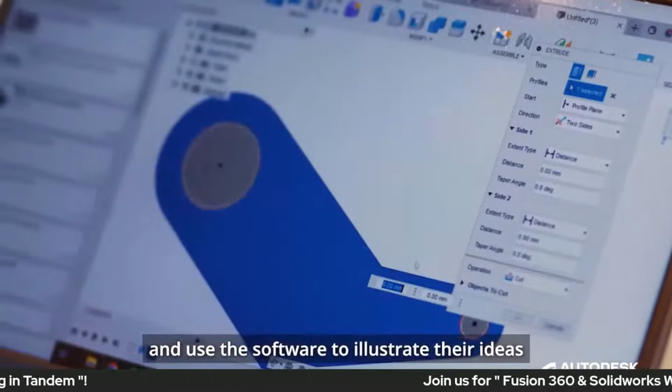We have donated about 20 canes to Society of the Aged Sick and St. Luke Nursing Home. Fusion 360 allows students to draft their design and use the software to illustrate their ideas and inform their discussions. Fusion 360 can be easily downloaded to a student's personal laptop and it is user-friendly. Our students knowing Autodesk products give them an edge in terms of future employment.

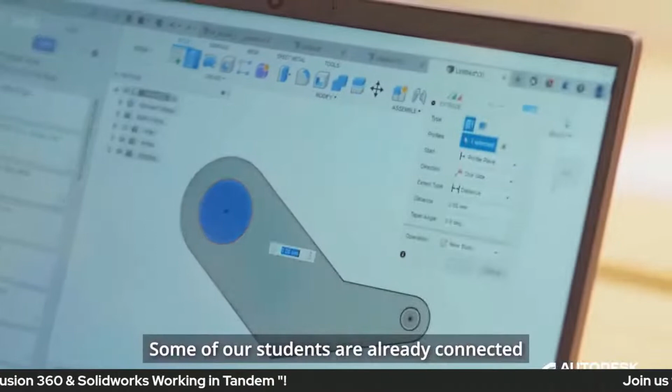Good afternoon, classmates. The last topic in today's webinar is entitled Fusion 360 & SolidWorks Working in Tandem. A little background for our topic today: SolidWorks is an assembly-oriented parametric program that offers advanced features for professionals. Its complex, customizable interface is geared towards experienced users. Fusion 360, on the other hand, is a multi-component part system that combines parametric, direct, and mesh modeling tools.

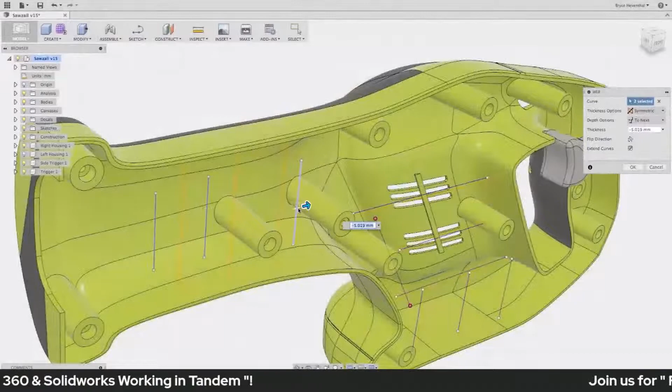What is Fusion 360? Is it a cloud-enabled collaboration platform that enables designers to instantly share, review project data, manage versions, find where used, and share ideas on any device at any time? Is it a 3D CAD application with both freeform and solid modeling tools seamlessly integrated into one application? Is it a 3D animation and rendering application? Is it the first cloud-enabled tool to provide 2D drawing capabilities? Is it simulation software? Or is it a CAM application for turning and milling operations?

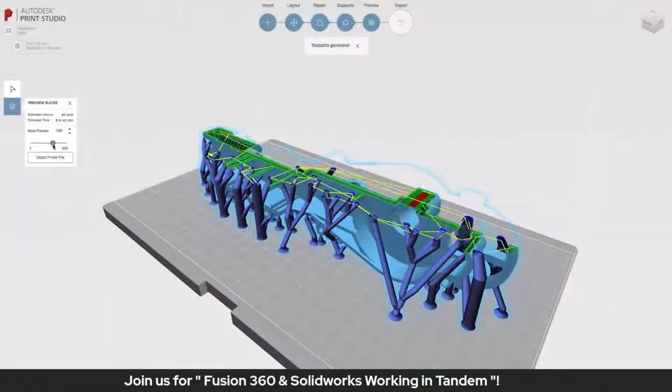This is what you need to know about Fusion 360. It's not any one of those things. It's all of those things. It's the next generation product innovation platform designed to work on Mac, PC, and mobile devices.

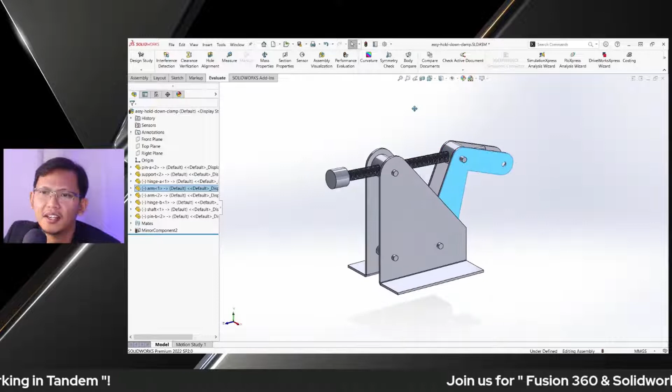I'm sure some of you guys have your own assemblies made in SolidWorks. So for me, in this demonstration, I have this assembly in SolidWorks. And my intent here is to bring this design over to Fusion 360. And let's say, in addition, my intent is to create a generative design, similar to this motorcycle.

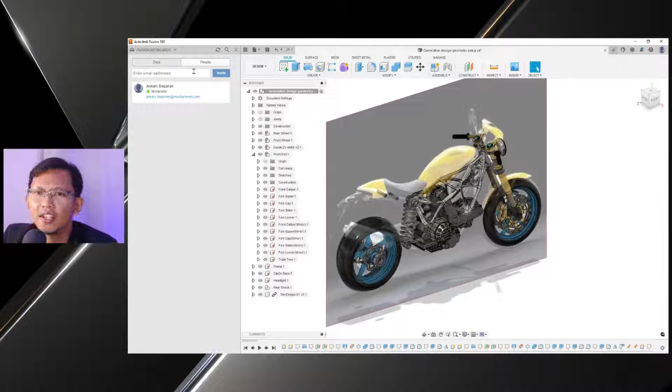Okay, so moving forward, I'm going to go back to Data. And I have gone ahead and created a new project, which is Tandem with Fusion 360. Same with Autodesk Inventor, Fusion 360 also has the AnyCAD technology. Again, our intent here is to bring in the native SolidWorks files into Fusion 360. To do that, I'm going to select Upload.

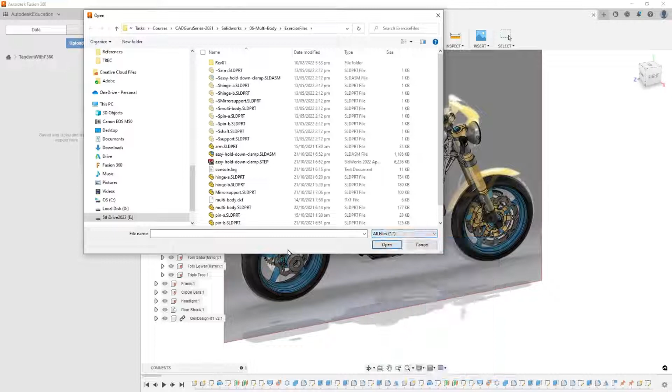And notice here under Select Files, under this drop down, Fusion 360 can accept files natively, even from CATIA, of course Inventor, the typical AutoCAD files, NX files, Pro Engineer, Rhino, yes, SolidWorks, Solid Edge, and also SketchUp files. So that's how versatile Fusion 360 is with working with other CAD platforms or CAD files.

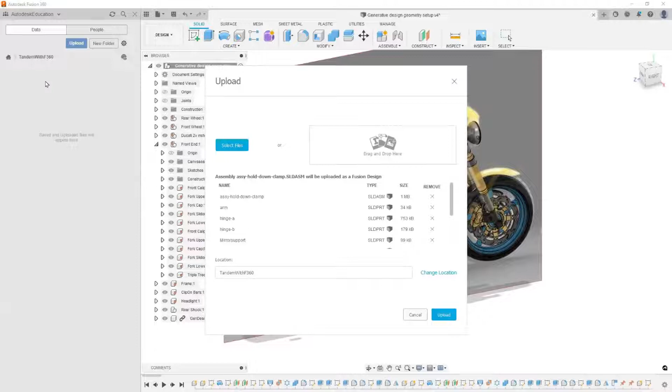Okay, so once more, I have my SolidWorks files saved in my local folder. So with this, I can easily drag and drop those SolidWorks files here. I can select all of the parts and assembly related to our SolidWorks design. So with these SolidWorks files selected, I'm going to left click and hold, simply drag and drop. So take note, check where your target location is. And now I'm going to select Upload.

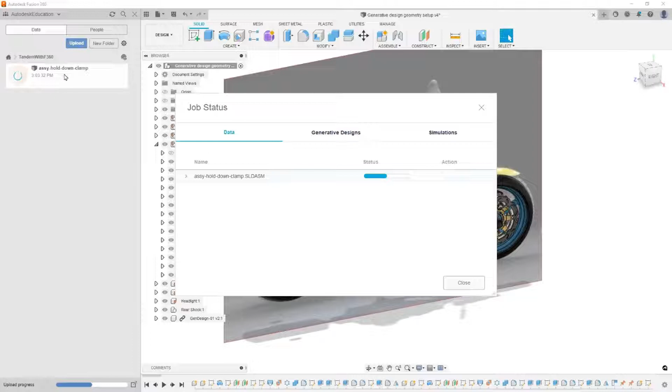Upload in progress. And notice on the left, we are seeing the files are populating this folder, starting with the assembly. Okay, assembly complete, selecting Close. Let's hover over assy hold down clamp. I'm going to right click and simply select Open.

Here it is. So notice in SolidWorks, this is the orientation of our assembly. Take note also of our axis: Y pointing up, Z pointing to the left. Heading back to Fusion 360, the orientation of Fusion 360 is, notice, Z is pointing up. Okay, so those are the initial differences between SolidWorks and Fusion 360.

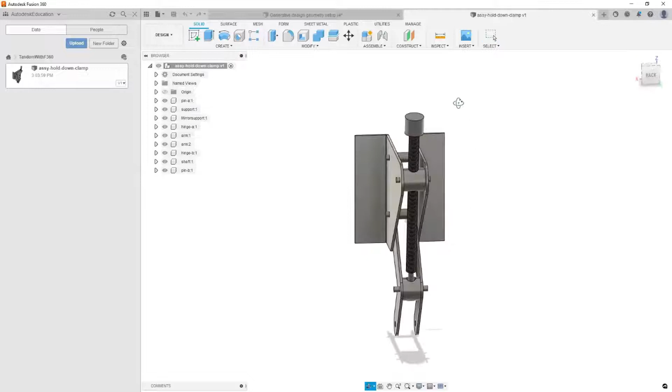So I prefer the orientation of this assembly to be the same as in SolidWorks. Okay, so with that, let me head over to Home View. I'm going to select Top and rotate this.

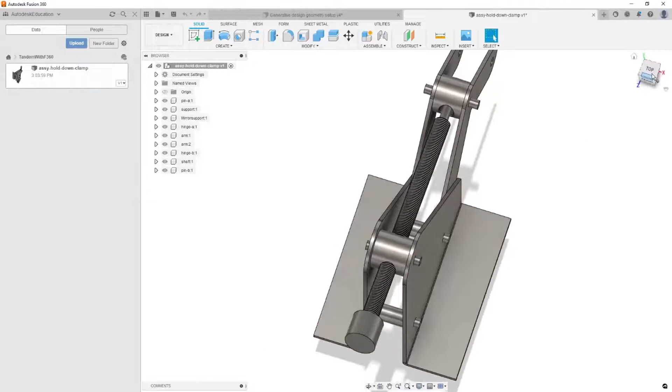Double click my middle mouse wheel to zoom extents. Heading back to our view cube, I'm going to right click and select Set Current View as Front. Okay, next I'm going over to Top View. Again, I'm going to right click on our view cube, Set Current View as Top.

Next, selecting Front, okay, and rotating this to our target isometric view. So notice the orientation of our view cube as well. I'm going to select this corner of the view cube, which will now give us the same orientation when I hit Control 7 in SolidWorks.

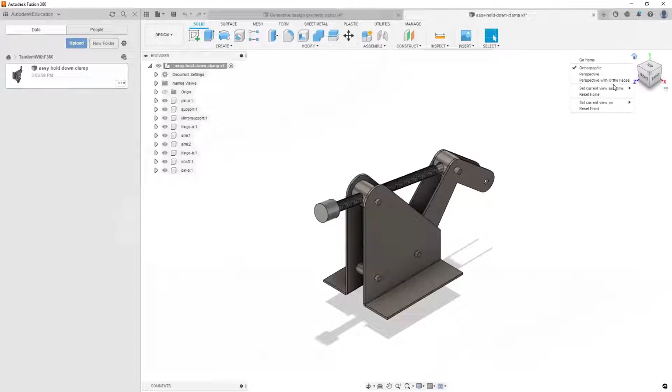So from here, I'm going to right click on this tiny house and set current view as home, fit to view. Okay, so now if I head back to home view, the orientation is now the same with SolidWorks.

For me, I already have the muscle memory for Fusion 360 and SolidWorks. But if you prefer to have the same navigation and controls in SolidWorks, we can head over to our profile under Preferences. We can head over to General, and under Pan, Zoom, Orbit shortcuts, we can select this drop down and change this to SolidWorks. In addition, Alias, Inventor, Tinkercad, and PowerMill are also available.

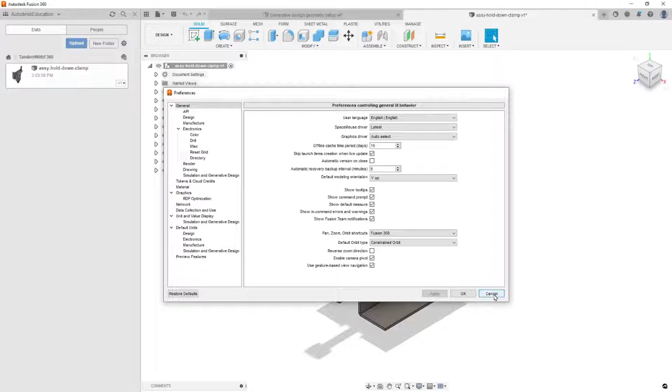Okay, selecting Cancel. And like any other software, sometimes Fusion 360 crashes as well. So let's hit Control S and save this file. Notice here from V1, it's now V2 or version 2. And because Fusion 360 is cloud-based, I can head over to our data panel and notice here we can open this design in our web browser. So I'm going to click Open on the web.

And let me show you my web browser. Notice here I have all projects. And here we have our project, which is Tandem with Fusion 360. So on the right, under Project Details, I can manage members and invite. I can invite our attendees right now who have registered and give them access to this design as an editor or simply as a viewer.

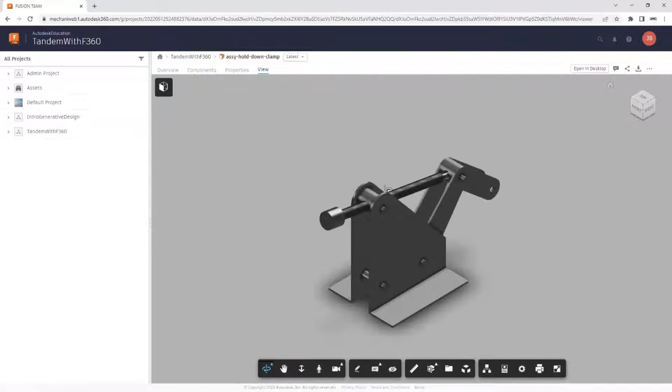So for viewer, the application for that is sharing this to your managers who have no need to edit, or to your suppliers and vendors. So here, going back once more to Tandem with Fusion 360, I'm going to select our file and left click here to open our design in our web browser.

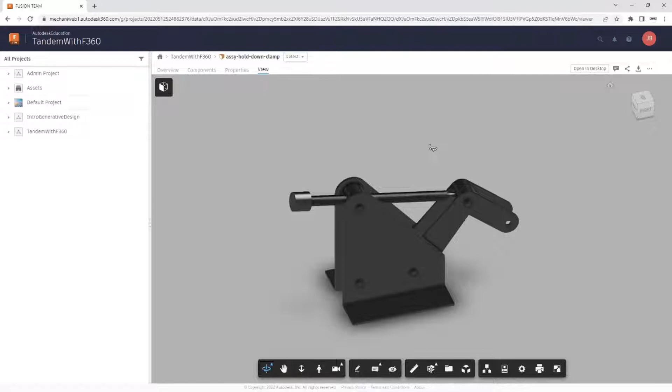So once more, if you moved to a different location and you don't have Fusion 360 natively installed, you can access your files anywhere with just a web browser. And that's an advantage of Fusion 360 being linked in the cloud. Also in this viewer, notice below we can add markups. Let's say I'm going to scribble down a circle. I can add comments. Let's say I would like to say greetings to all our students.

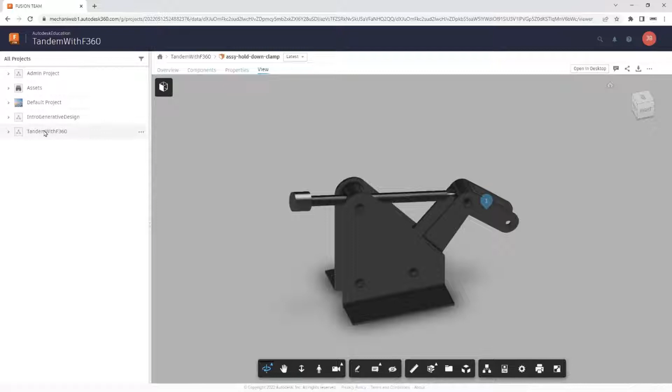In addition, we can measure our design, have a section analysis, or do an explode model. Let me head back once more to the Tandem with Fusion 360 project. And I hope everyone is familiar with Google Drive. So with Autodesk and Fusion 360, the equivalent for Google Drive is A360. So with that in mind, we can also upload non-Fusion 360 files into Fusion 360. So for demonstration, let's say I would also like to save these native SolidWorks files into Fusion 360.

With my target files selected, I'm going to copy the location of our folder, hitting Control-C, heading now to our web browser, selecting Upload, and in addition, notice we can upload files coming from Dropbox. I'm going to select File, paste down its location, and from here, we can now select these SolidWorks files. In addition, let me add this DXF file as well. Notice multiple selections allowed, selecting Open. Files now being uploaded.

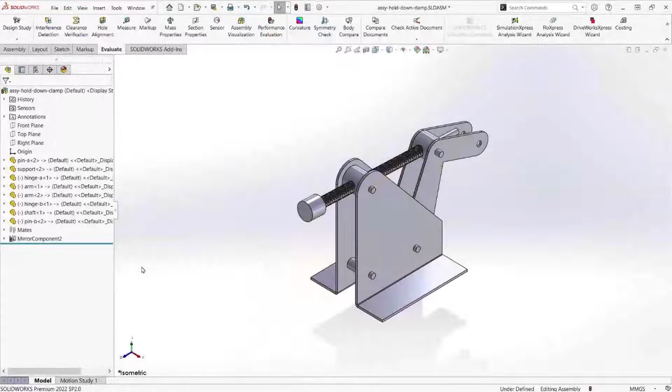Another important distinction between the two is in SolidWorks, we have the Feature Manager Design Tree, where all features are registered on the left side, while in Fusion 360, the features and history are all registered below. And when we import a non-native Fusion 360 file, initially, the timeline is not available. So notice here, it's just comments and the navigation bar. To bring that up, all we need to do is head over to our main file. I'm going to right-click on the hold down clamp assembly, and simply enable Capture Design History.

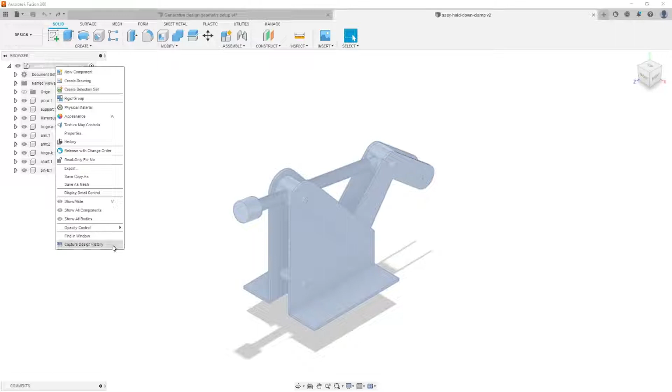So notice we now have the timeline, which is once more the equivalent of the FeatureManager Design Tree, where every feature that we are utilizing and creating in Fusion 360 will be registered here.

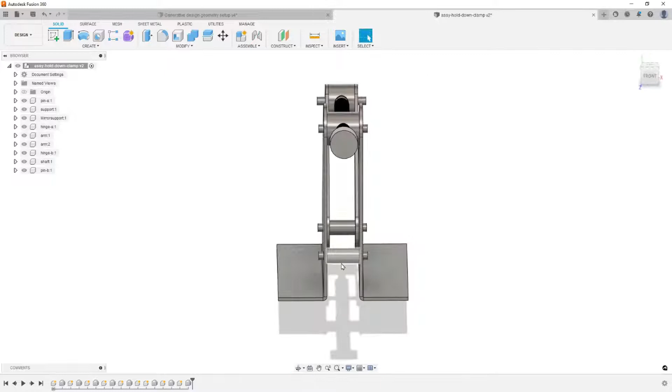I'm going to hover over pin A, selecting this, right click, and select Ground. When we ground something, we are removing all of its degrees of freedom. So notice as I left click and hold, I can't move the pin. But of course, the rest are free to move, having their degrees of freedom still not yet defined.

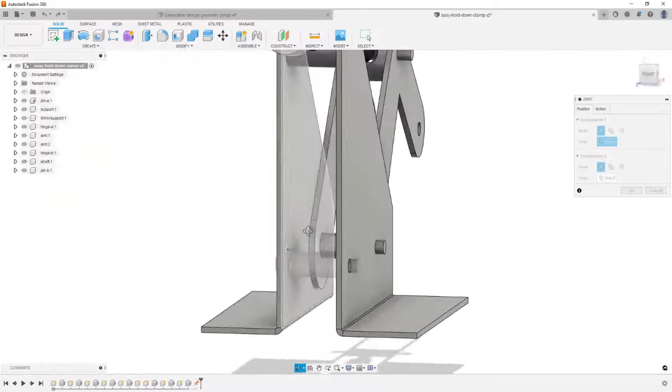Moving forward, let's now add joints. Heading up to Assemble, selecting Joint. And before we pick out the joint origins, let me head over to this Motion tab and set our target motion type to be rigid. Heading back to Position, and for Component 1, I'm going to hover over this face. So notice the joint origin attached to our cursor. Again, notice as I am hovering over these faces.

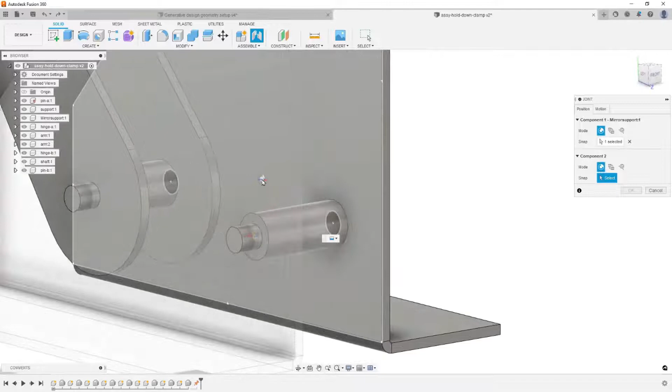Next, I'm going to hold Control while hovering over this face. And notice as I hover over other faces, I am locked to this face. So with that, I'm going to select this joint origin, left click, heading over to our pin A and defining the joint origin for component 2, hovering over this face, holding Control, and left click. So notice those joint origins mate with each other. I'm going to select OK and inspect.

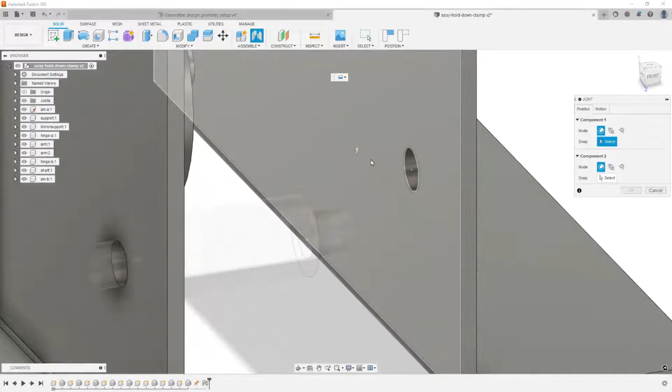Next, applying the same procedure. In addition, recall our previous command was joint. So with that, I can right click in Fusion 360 and select Repeat Joint. Hovering over this face, holding Control, selecting this joint origin. Left click, heading over to our pin A, hovering over this face, holding Control, and selecting this joint origin. Left click, selecting OK.

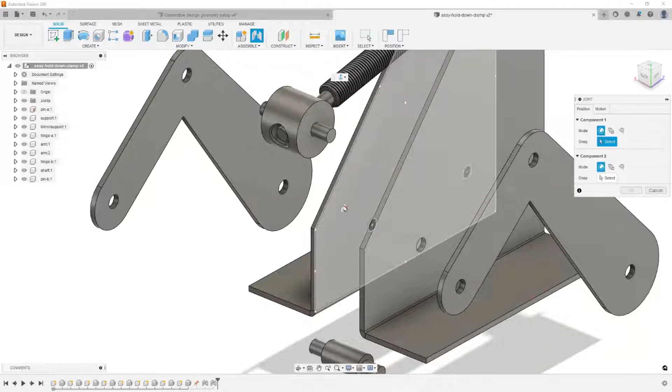Next, let's bring in our arms, and let me pull this pin out, hitting J, the shortcut for joint, and this time our target motion type to be revolute. Heading over to Position, hovering over this face, holding Control and selecting this joint origin. Next, moving over to the other side, hovering over this arm's face, holding Control, selecting this joint origin, selecting OK. Let's inspect. I'm going to hover over this face, left click and hold. Repeat that step once more.

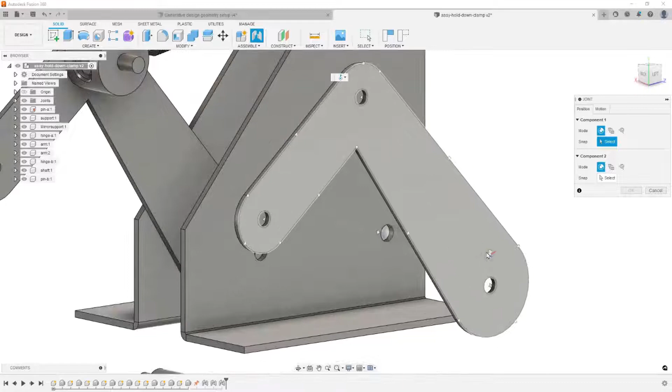Hitting J for joint. Hover over this face, selecting this joint origin. Heading over to our support. Holding Control, selecting this joint origin. Notice the preview. Obviously, it's revolute. Selecting OK.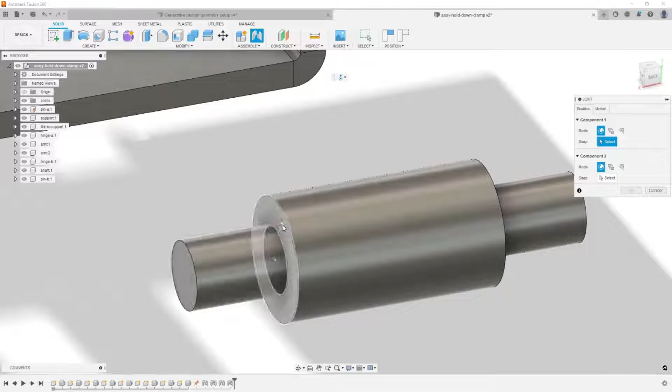Next, let's bring in pin B over here. Hitting J for joint. Motion type to be revolute. Hovering over this face, holding Control, selecting this joint origin. Moving over here, holding Control, selecting this joint origin. Selecting OK. In addition, we can also add that revolute. But for this instance, it will now suffice.

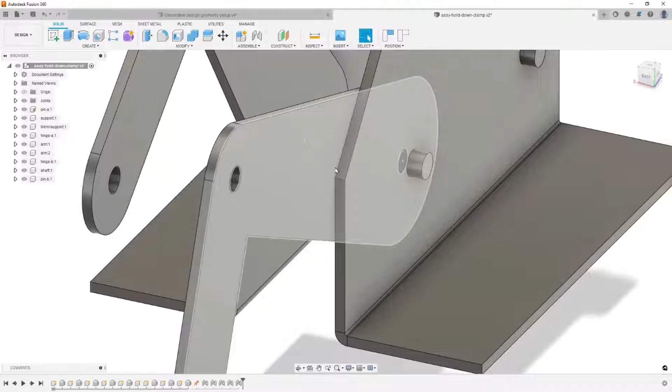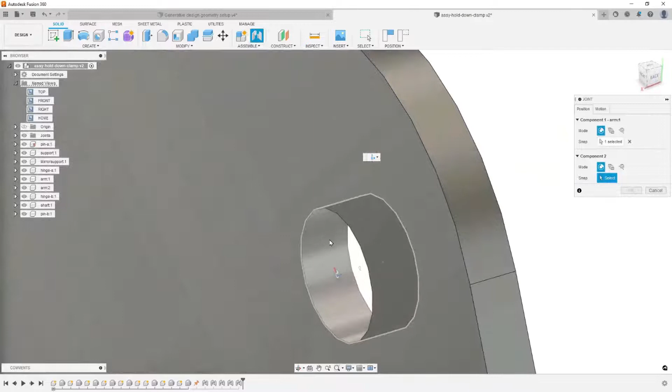Moving forward, let's focus on our arm. Let me move this to the side. Hit J for joint, motion type, how about cylindrical? Heading over to the Position tab for component 1. I'm going to hover over this cylinder, holding Control, and I'm going to select this joint origin at the center. For our component 2, I'm going to head over here, hover over this cylinder, holding Control and selecting this center joint origin. Selecting OK, and because that cylindrical joint relates with our revolute, notice it moves in unison.

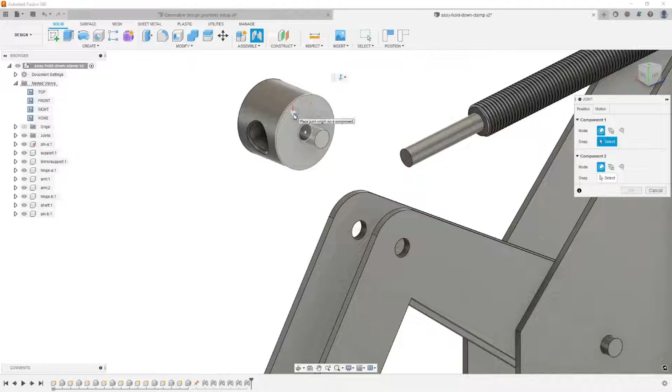And finally, for our hinge B, hit J once more, motion type this time to be revolute. Heading over to Position, defining component 1, hover over this face, holding Control, selecting this joint origin. And I want this to mate with this face, specifically this hole. Holding Control, selecting this joint origin. Selecting OK, and let's inspect.

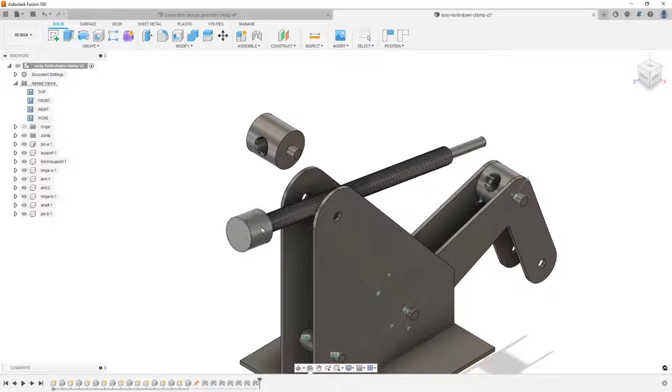Awesome. Moving forward, let's focus on hinge A. So moving this aside. Same with our shaft. Hitting J for joint, and I prefer utilizing revolute.

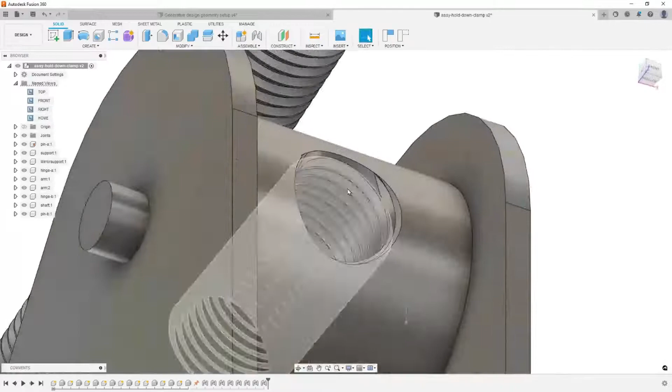Again, under motion, hovering over this face, selecting this joint origin. Hovering over this face, selecting this joint origin. Looking nice, selecting OK. Let's now bring in the shaft. And what I'm seeing now is having the challenge to select the face for our joint origin.

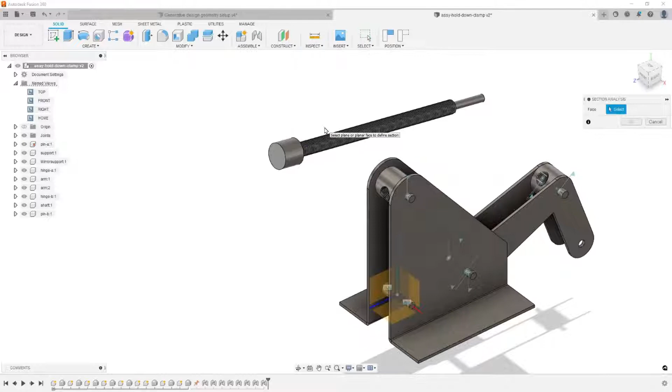Let me head over to inspect and let's have a section view. But first, let me bring this to the other side. Under inspect, selecting section analysis. I want to cut this assembly in half. So selecting YZ plane. Selecting OK. Let's now hit J for joint. And the motion for this should be cylindrical.

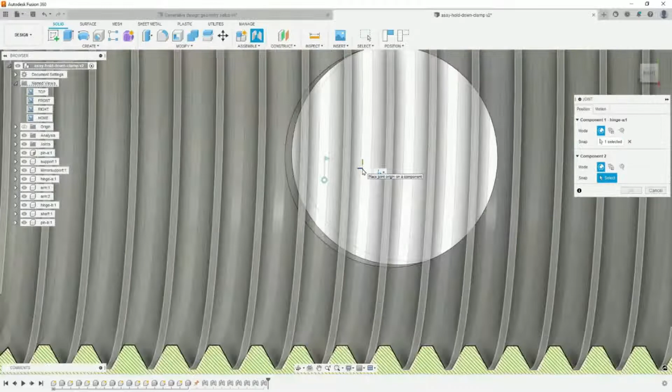And under position, let me hover over this face, holding control, and select this joint origin. I hope you're seeing this. Heading over to front view, so it looks like it's the center. And the same with our shaft.

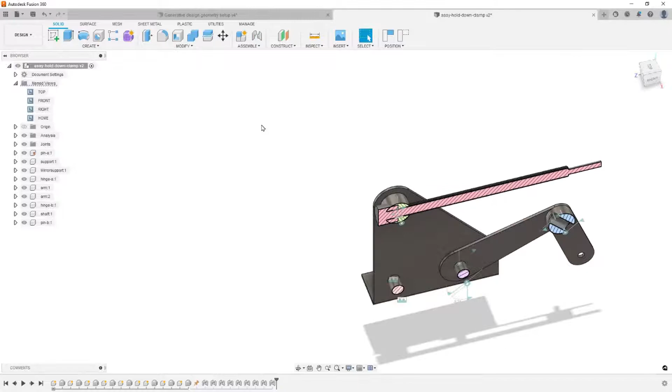I'm going to zoom in, hover over this face, holding control, and locating that joint origin, which is this origin. Notice the preview, selecting OK. And to turn off the visibility of the section analysis, it's simply heading over, twirling this down, and selecting this eyeball.

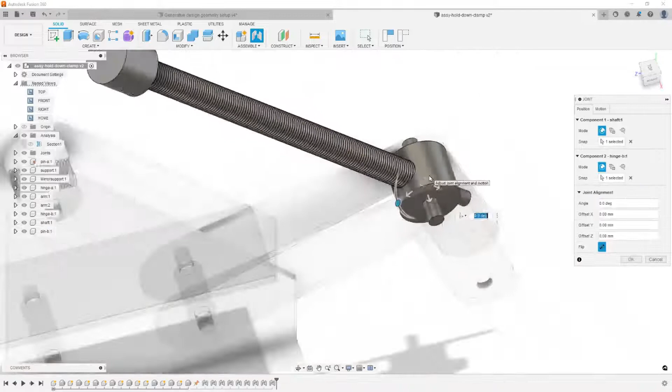Looking nice, and finally hitting J once more. Motion type to be cylindrical. Hover over this face, holding control, selecting this joint origin. Hovering over this face, holding control, and selecting this joint origin. Selecting OK. And let's inspect.

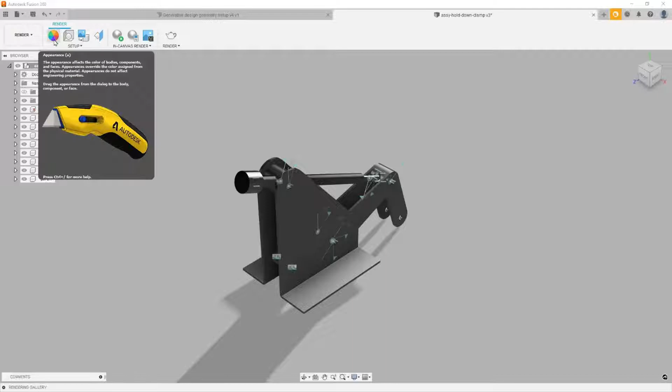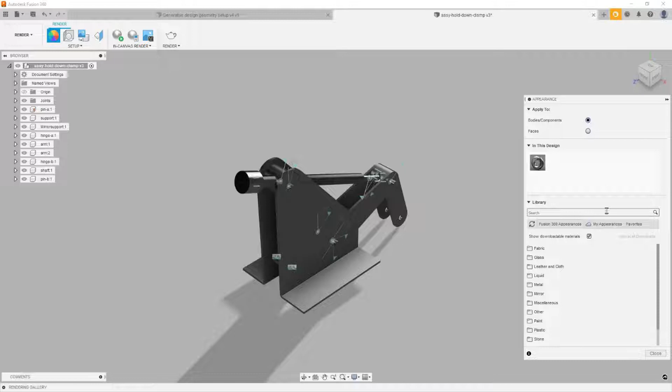The first step would be assigning the materials to our model. So shortcut key for this is letter A. And we have options here to apply this to bodies or components. So these are all bodies and or components. And the other one are simply faces. Okay, so let me first head over to our library, and by default, the default appearance of our bodies' components is steel satin.

So below on the library, we have tons of options. It can be metal. Let's say I prefer aluminum anodized rough blue. So it's simply left click and hold, drag and drop. So now in this design, we have an additional appearance, which is aluminum anodized rough blue. Okay, so to remove a specific appearance is simply right clicking here and unassign and delete.

Okay, so feel free to browse over the library. So we have glass, metal, once more, liquid, leather and cloth. We have paint. We have plastic. Okay, stone. So if you have woodworks. So for this demo, I would like to assign a glossy paint. And recall, a while ago, we applied appearance to bodies and components. For faces, let me enable faces.

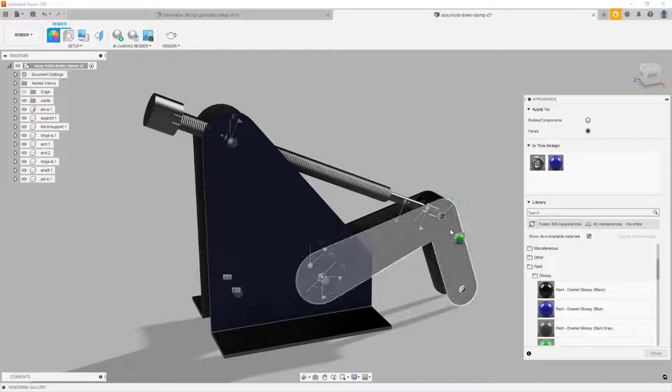It's simply left click and hold. Let's say I would like to assign paint enamel glossy blue to this face. Okay? Or green to this face. And for this scenario, I prefer adding appearance to bodies components instead of faces. I'm going to delete and unassign this in our design.

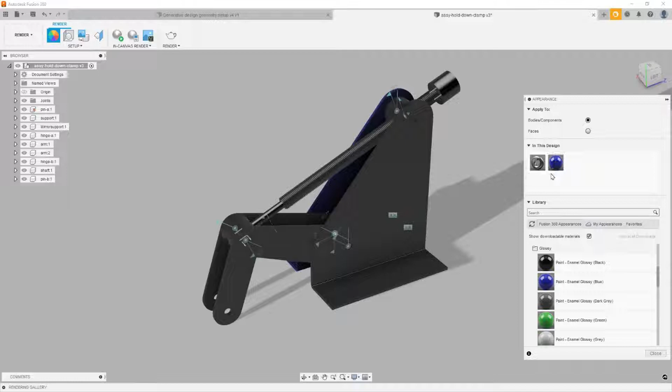Let's enable apply to bodies and components, assigning paint enamel glossy blue to our support. Same on this mirrored component, hitting A. And from here, because this is prevalent, I can head over here in this design and reuse this. Drag and drop. Let's say for our arm, I prefer yellow color. Left click and hold, drag and drop.

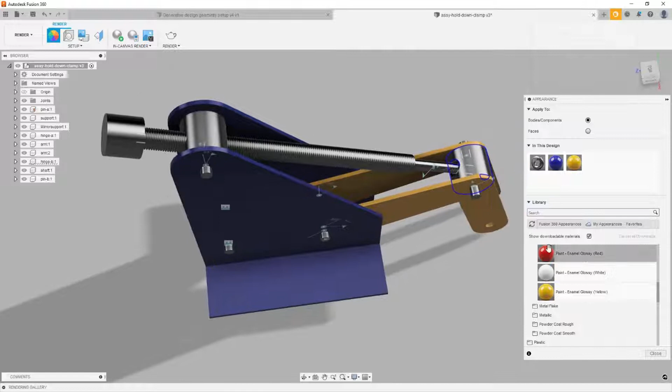And same on this arm as well. So we have a warning. Notice an appearance was already assigned, so I can remove and apply. Next, how about red for our hinge? Left click and hold, drag and drop.

Head back up. And for our hinge A, instead of drag and dropping our appearance on our model in the canvas, I can twirl hinge A, head over to bodies, head back to our library, left click and hold the paint enamel glossy red. I can drag and drop our appearance on top of our component. I'm going to release. Notice it's now assigned on the body of our component hinge A.

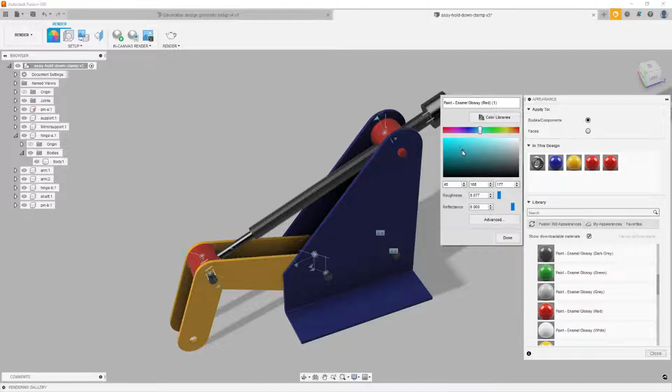And let's say for our shaft, I prefer a different color. So with that, I can head over to any of these three paints. Let's say the red one, I can right click. I'm going to duplicate this. Head over to this duplicate, right click and select edit. And from here, we can assign RGB values or adjust the slider. I prefer this color. Selecting done. So notice it updates, and from here, from this customize appearance, I can left click and hold, drag and drop.

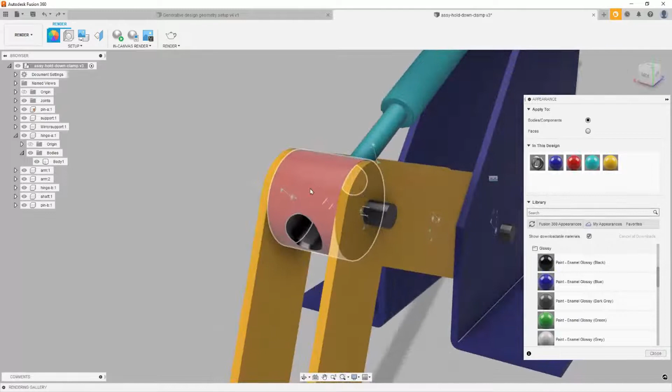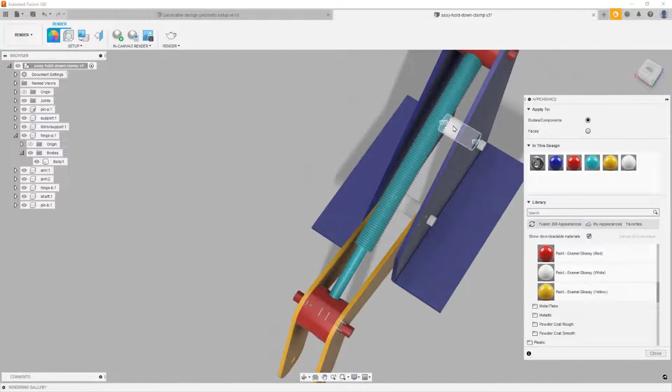In addition, I am seeing our red paint was not properly assigned to this body or component. I'm going to head back to our paint enamel glossy red, drag and drop. So we have a warning, simply selecting remove, and it's now applied. Heading back to glossy, I prefer paint white for our pins. And same with our pin A. So with both of these components selected, I'm going to grab our paint white, drag and drop. So notice we can assign appearance to multiple selections.

And if ever we have a change of mind, I can simply, for example, shaft. I prefer this to be, how about a metal? How about aluminum? Anodized rough. Left click and hold, drag and drop. Let me close the appearance.

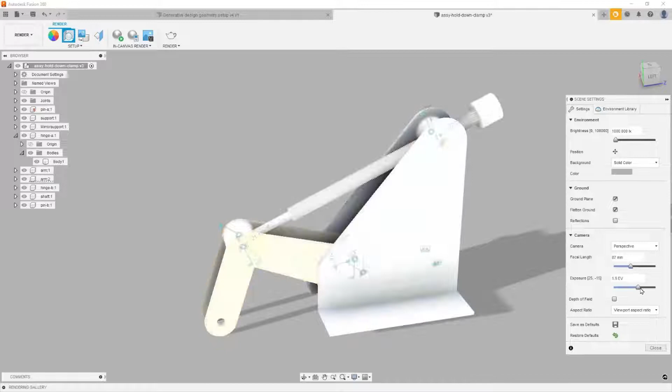Next, heading over to our scene settings. Now under settings, I prefer for this render the ground to be flattened. And let's disable reflections. And from here, we have the options to tweak the camera. We have a choice for orthographic, perspective with ortho faces. We can adjust the focal length, the exposure. And for the depth of field, I'm going to enable this once we enable ray tracing. Heading back to our scene settings, we have the addition for aspect ratios. We can save this as our preferred default settings or simply restore this at its default.

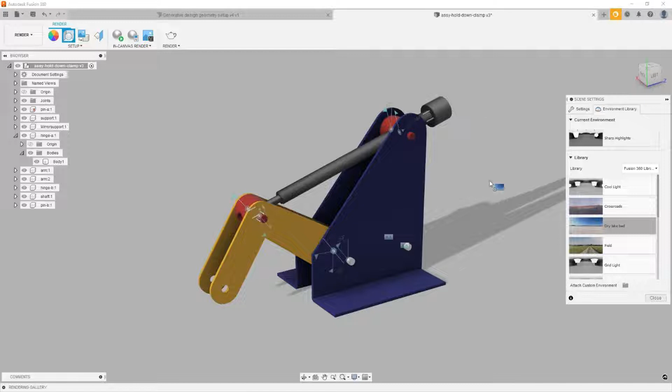Next, in addition to scene settings, we have environment library. And by default, the current environment is Sharp Highlights. Also in Fusion 360, we have some environments loaded by default. So here we have Crossroads, Dry Lake. Let me bring in Dry Lake, and for us to see the environment applied, I'm going to left click and hold, apply this by dragging and dropping this anywhere on our blank canvas. Release. For us to see the full effect of this environment, we should head over to settings and under background, enable environment. Notice environment in effect. Heading back to environment library tab.

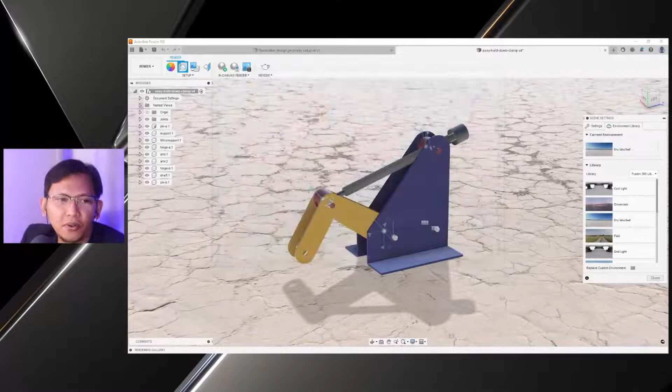In addition, if ever you want more flexibility, we can select attach custom environment. So notice here, we are given an option for an HDR or EXR. I'm going to hit cancel for now and show you a great resource wherein we can download free HDR or EXR files. The site is Poly Haven. So notice here they have thousands of environments for you to download and use in Fusion 360. I'm going to head over to my data panel and open a new file which I have downloaded from GrabCAD. Closing the data panel.

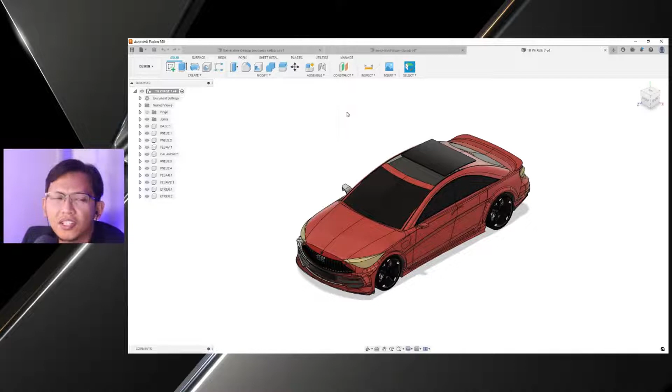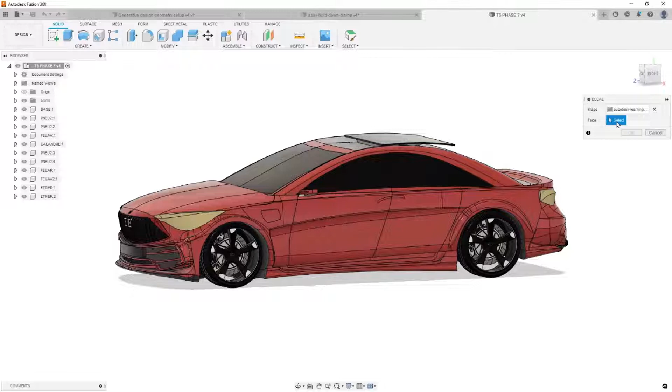And before we head back to Render Workspace, there may be instances that you may want to insert stickers or decals. To do that, under Design, it's simply heading over to Insert and selecting Decal. Selecting Insert from my computer, and let me insert first this logo. So take note, it is preferred to use a PNG file because it has transparency. Selecting Open, and we are now prompted to select a face to where we would like to place the decal. So I prefer having it here.

Heading over to Right View, and I can select this handle to scale this up, move this, or rotate. Let me select OK, and that's how simple it is to add a sticker or decal in Fusion 360. Let's now head over to Render Workspace.

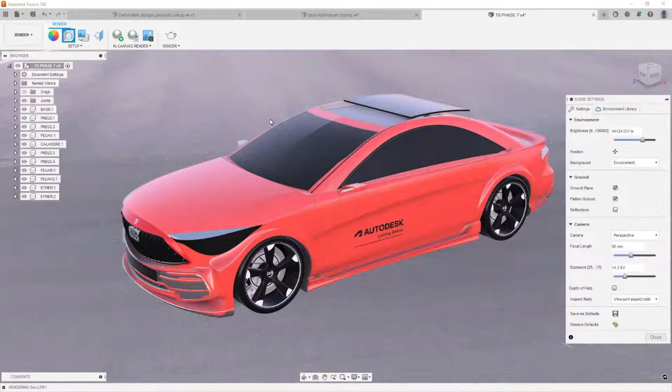And notice here, this file already has an environment. Let's insert the HDR file I have downloaded. Heading over to Setup, under Environment Library, selecting Replace Custom Environment. And here I have gone ahead and downloaded Snowy Field. Double left click. Let's now head over to Settings, Inspect, head over to Position, selecting Ground Scale.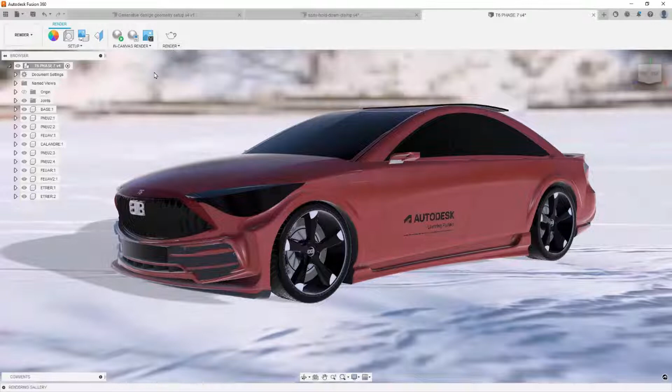Zooming in. I'm okay with this frame, selecting Close, and once more, Fusion 360 can render this image in two ways. One is using your local hardware, which is under in-canvas render, and because Fusion 360 is linked to the cloud, it can also do a cloud render. For now, let's do an in-canvas render.

And from here, you may also apply a depth of field. Let's say we want this area in focus and the rest to be blurred, enabling depth of field. And for the center of focus, I'm going to place it here. Left click.

And in addition, we can adjust the blurry effect. For me, I prefer having this set to 0.8. Definitely your knowledge of photography will be beneficial in this situation. Let me now select Close.

And here at the bottom right is where we can set the quality of our render. For me, I want this to be at infinite, but once this blue bar reaches final, the difference between the final and infinite image is not noticeable anymore.